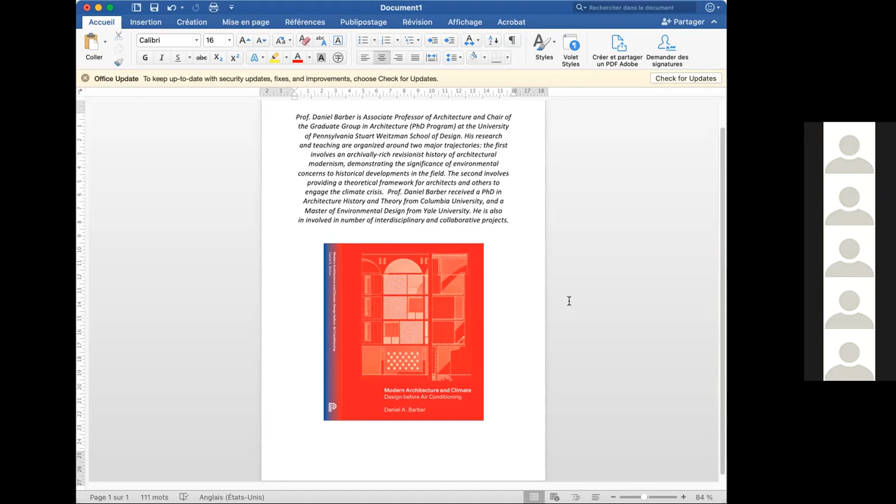Because maybe if you think why all the tapestry, the carpet, the curtain, the screen become something decorative, meaning without really use or function - it was because the central heating system, the air conditioning, solved all the thermic problem that was made by the decoration before the 20th century.

So it means a carpet in reality was a kind of thermal insulation, like a tapestry on the stone wall in the old castle was something to block the cold radiation coming from the wall.

And maybe during the 20th century, we have forgotten all this function of the decoration, and the decoration became something that was no more really important. It was just decoration with this kind of bad idea of decoration - just it's nothing, it has no use, no function.

And today, because we can no more use so much energy in the interior of the building, we have to add some thermal insulation. There is some regulation in Europe, in Switzerland - you need to have a minimum of 15 centimeters of rock wool or whatever kind of wool you want.

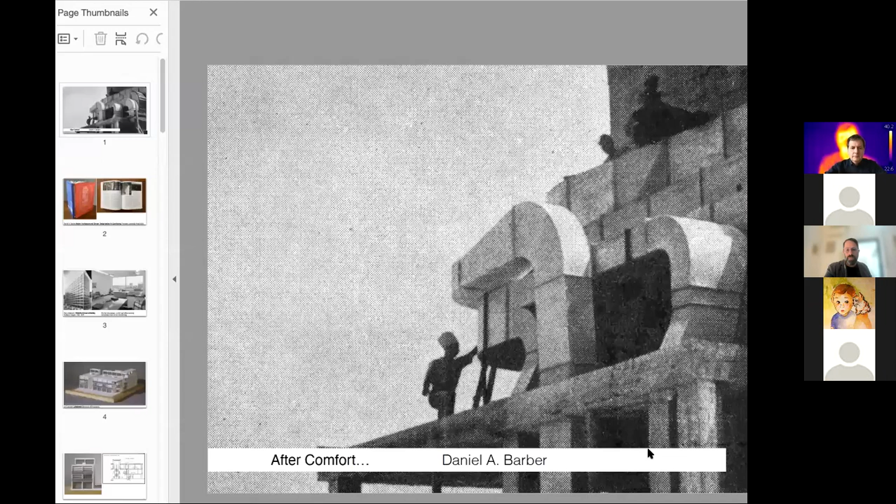So I'm going to go ahead and share my screen. Let me see - this little dance here, give me one second, I always have to do a little dance. Oops. Okay, yes, it's good, we can see. Okay, I'm just going to make one little adjustment, sorry, one more second.

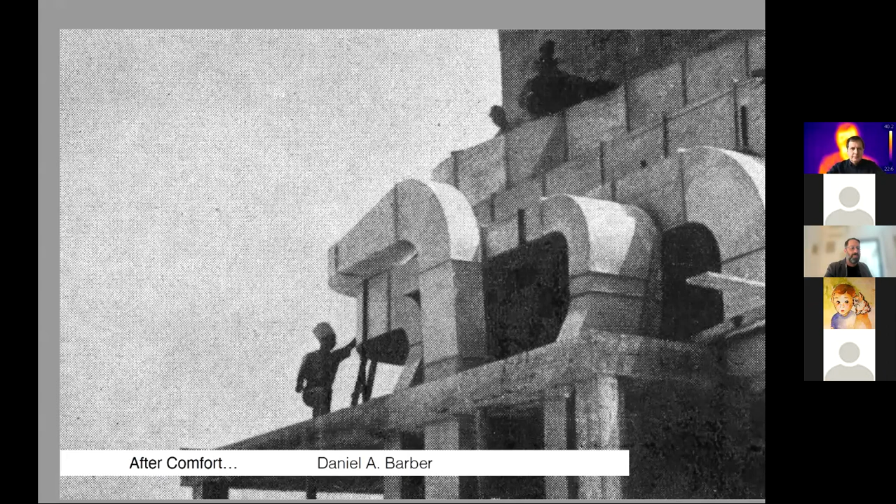As Philippe laid out, my research really has two components, and I want to try to tease out both of them today in the next half hour, maybe 40 minutes, and then hopefully have some time for discussion as well.

I'm both an architectural historian working through environmental histories of architecture, thinking about how buildings are situated in their ecological, material, political context, especially relative to questions of mechanical heating and cooling. Part of that idea is to reveal a rich archive.

And in the book that was just noted, here's another image of it. Let me see if I can get the slides to work. Okay, here's another image.

Also in my first book, called A House in the Sun, which looked at solar heating design strategies, more in the American context, the idea is to demonstrate that there's a rich history of these environmental questions in our field, and that they're available as archives for us to go back to for inspiration.

The second related focus is to convince architects and students such as yourselves—although maybe in this case you're already convinced, but we'll see how this plays out—to focus work on the climate emergency, both as an obvious and also somewhat difficult task.

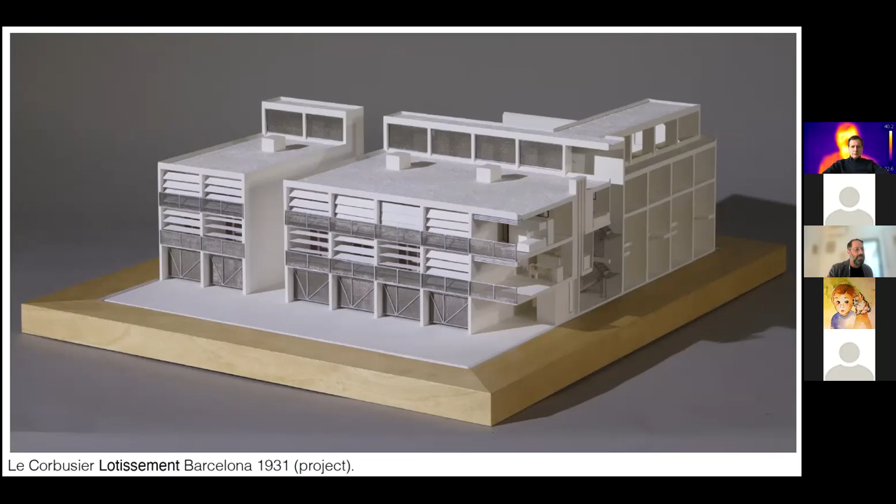So we can look at a couple of issues here with this model, made much later but nonetheless helps us see what's at stake. The main focus I want to tease out is not only that this building was essential to reimagine the facade as a climatically adaptive system, but also to do so through visual representation. Part of what I'm structuring in the book is a history of modern architecture from about 1930 to 1960 that focused on producing images around how to adjust our relationship to climate, how to reimagine these nature and culture interactions.

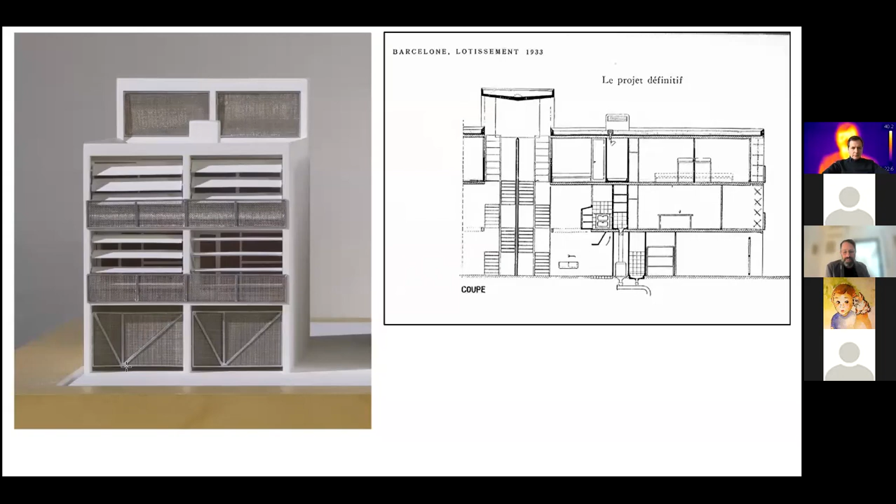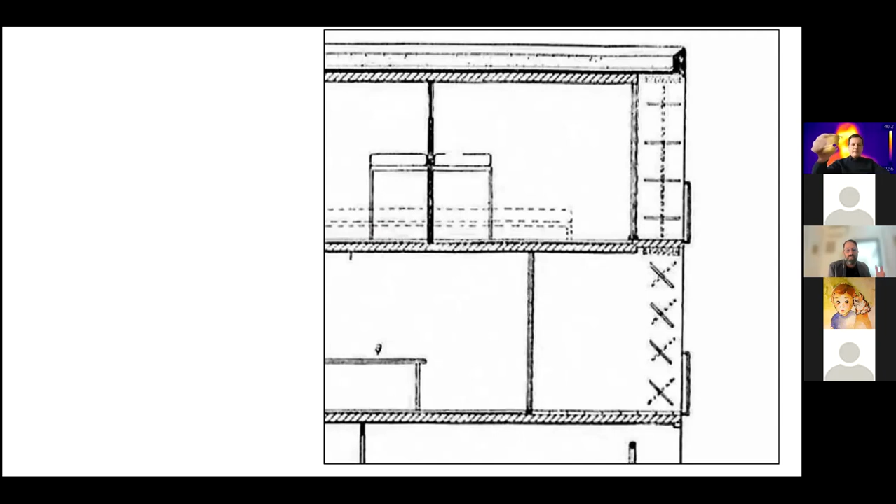In this context, we see this facade with operable shading louvers that can be adjusted according to daily and seasonal patterns. We see in this section, if I zoom in here, this way of representing that manipulable facade—both the diagonal lines and the horizontal and vertical lines attempting to render in graphic form that this facade is dynamic and available for adjustment according to different conditions. I'm mapping this somewhat tongue-in-cheek, but nonetheless as a sort of originary moment of this interest, not only in climatic adjustments, but in the ways those have resonance across graphic communication tools.

This is another, more elaborate version of the media of architecture as a device for climatic adaptability. We can even begin to imagine or choreograph those interior conditions as they relate to this facade. You might wake up in the morning and open the sash, then around noontime make sure the vanes are correctly tilted to block the sun out, and maybe adjust the blind in the evening while sitting in this planted space, allowing the sun to come in or not depending on variations of climate.

This already suggests a broader aspect I want to play out: the notion that the practice of climate adjustment is on one hand structured by the architectural design, but then enacted by the occupant. So we have both the design aspect and the experience of that aspect in the interior.

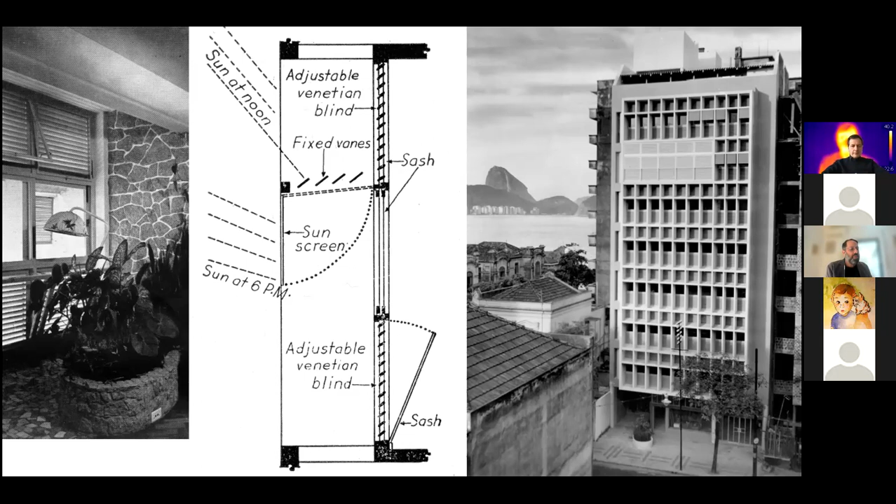So two points already on the table, maybe three. The first has to do with the graphic elements—the media of representation as a means to understand the climate relationship between the conditioned interior, here not conditioned mechanically, and the changing climate outside. The second is figuring architecture as a device for climatic adaptability, understanding that as one of the engines of the modern period, of the early developments of architectural modernism. And the third is this question of thermal practices—the different ways design and forms of inhabitation work together to articulate those specific climatic relationships.

I'm just going to run through a few images to play this out for a second—again, much too provisionally—to show that, in the broader version of this, I try to make the elaborate argument that by virtue of this climatic adaptability, we could argue that modern architecture emerges from this Brazilian context. It's really in Brazil, in the global South, in the context of finding ways to use shading mechanisms to accommodate different types of interiors.

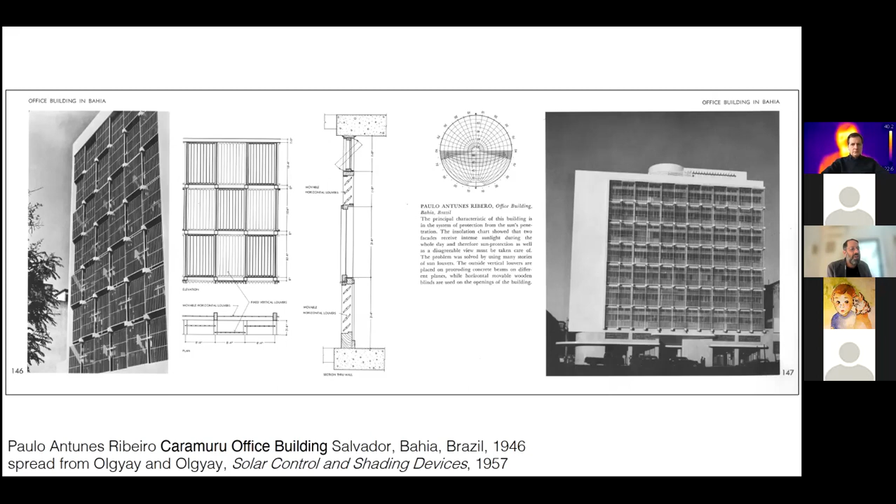It's in that context that a certain flowering of modernism begins and spreads around the world—a kind of counter narrative. I'm following here Barry Bergdoll, the eminent historian and curator, who writes in a 2015 catalog that these images, these buildings in Brazil, are previsions of a modernization to come, rather than receiving knowledge from Europe and the US, they're cycling it back, disrupting patterns of influence while celebrating the diversity and variability of these mechanisms.

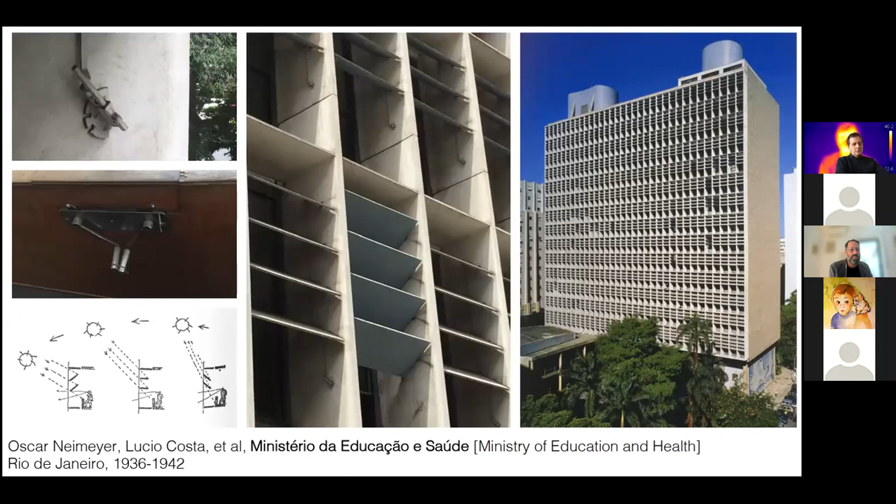This is maybe a building many of you know, the Ministry of Education and Health by Costa, Niemeyer and their colleagues, often regarded as one of the largest first large-scale administrative structures of concrete modernism, and one of the more prominent modern buildings in Brazil. In the book I trace a bit more some of the legacies this is building on—one of them indicated here.

I'm trying to map and fill out this picture of Brazil as the emergence of a certain relationship—the built interior, the design of that interior as a climatic object or climatic space, and how it relates to the exterior. What I'm skipping over today, unfortunately, is the intervention of building scientists and other specialists who helped clarify the precise details of where the louvers should go, how they should be hung, in what direction, according to emerging knowledge around meteorology.

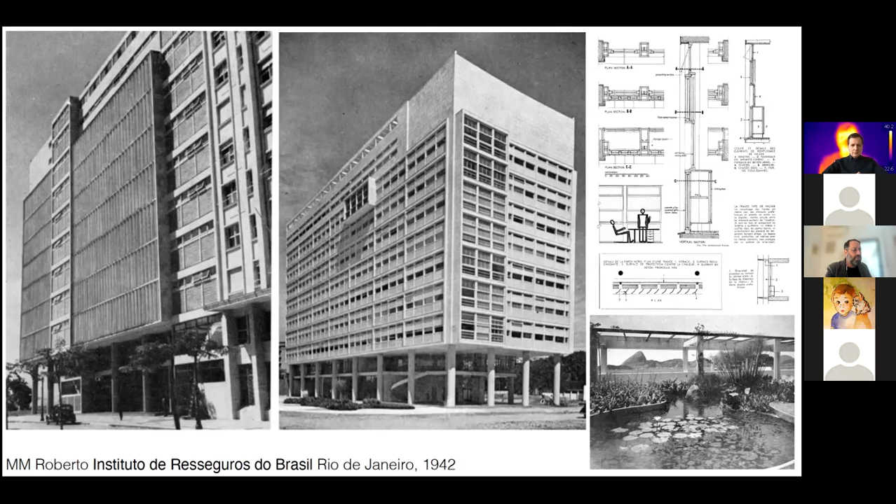But in the spirit of this quick run-through, I want to jump to other projects to expand this picture. If we're beginning in Brazil, claiming it as one of the originary sites, part of what's at stake is the political complications of Brazil in the 1930s, in the midst of the so-called authoritarian democracy of Getúlio Vargas, the Estado Novo period. This building helps clarify that this legacy of the shaded facade isn't simply a means to open up building practice in areas without much access to infrastructural energy sources.

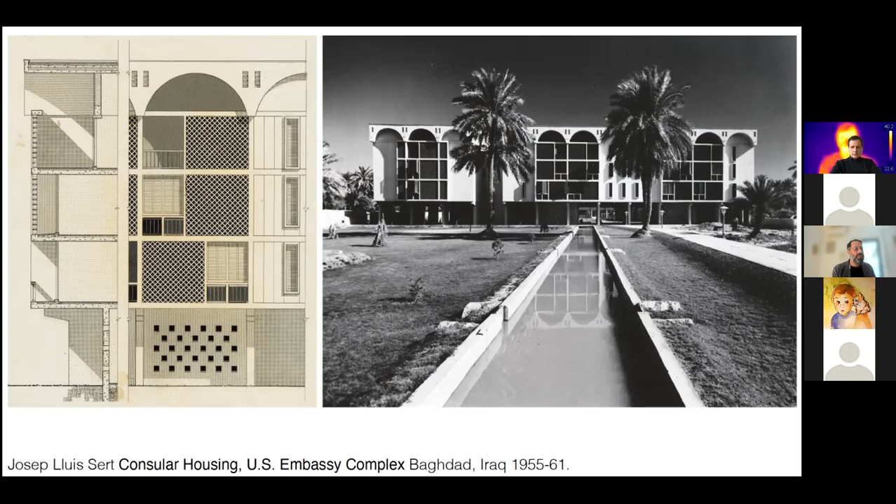So in some sense, this kind of modernization that came was that of the mechanical air conditioning system, the fossil fuel derived cooling capacity that dramatically transformed the conditions of the interior in ways those shading mechanisms could not have—and in ways that were, as we're still coming to terms with, quite detrimental to the global climate. So one more quick narrative here before I jump to a second part.

In that first arc, that first discussion, modern architecture emerged, in some sense, or a certain type of it emerged out of Brazil and performed this climatic adaptability, but did so in ways that are quite discomforting, and then cycled back to those air conditioned systems. That's one narrative—the narrative of passive cooling techniques, or at least the shading techniques that allowed for a certain type of life to persist.

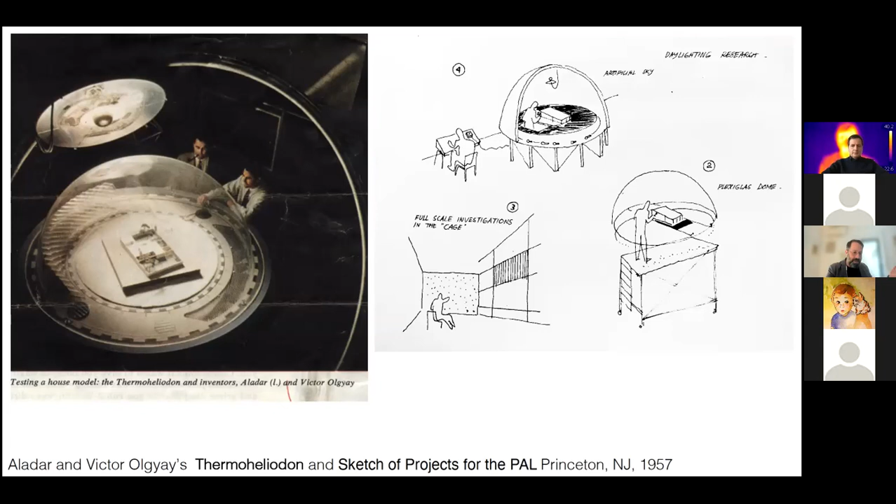Just before the computer took over, quite literally, historically, this was an attempt to perform an analysis saying that one of the essential aspects of understanding a building project is understanding its site for its very precise climatic conditions. They produced this very opaque methodological system that's quite hard to follow in any short form, and certainly even if you dig into it, it's pretty complex.

However, it's since been computationalized. If anyone is familiar with the Ecotect performance software, it's now embedded into Revit, into other Autodesk products. But Ecotect was initially programmed by a Western Australian architect directly out of the Olgyays' diagrams such as this. So what we're seeing is a sort of pre-computational set of systems, parameters, structures and processes that encourage the designer to attend to the details of the site in producing the architectural object.

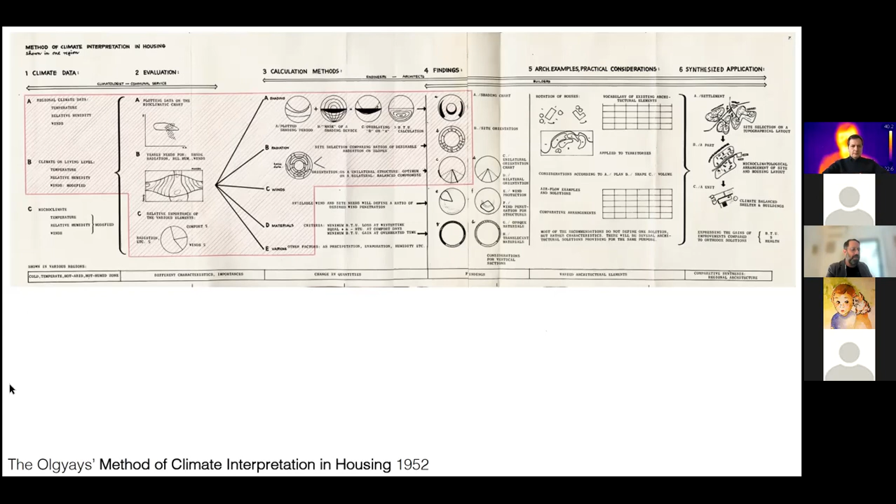So just to close this loop far too quickly, but nonetheless—part of what's at stake as these climate systems became technologized, became industrialized, entered into a broader set of architectural research strategies by virtue of providing certain technical systems and their parameters, is we see the emergence of this concept of comfort. That's what I'm going to switch to in a moment.

So this notion that part of the design process is to articulate a condition of comfort that will allow the building to mitigate and modulate the various climatic conditions in which it finds itself, so as to produce the optimal conditions on the interior.

Now, the coda to this story, the epilogue, is that while these comfort conditions were theorized and experimented with by the Olgyays and their colleagues without mechanical conditioning, without air conditioning systems fed by fossil fuels, the basic parameters they articulated were soon captured by ASHRAE and other regulatory systems that sought to optimize those thermal conditions of the built interior.

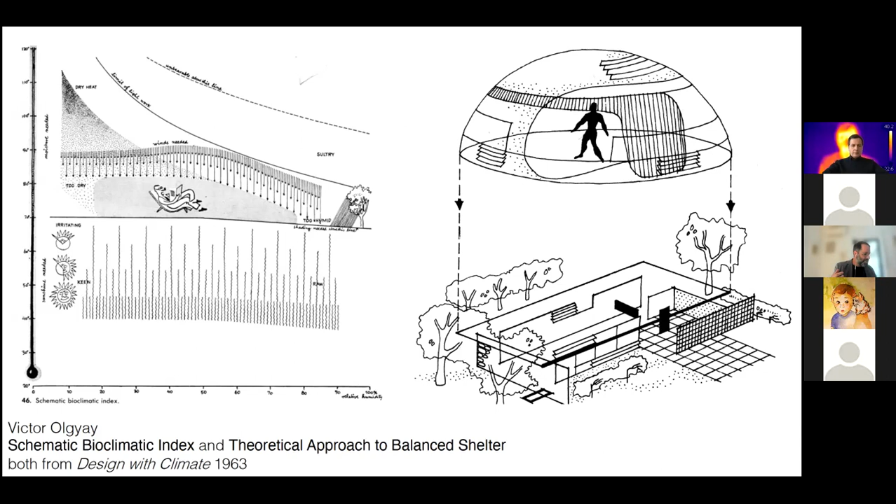And I'm going to do so while clicking through some relevant images that are not directly tied to any given notion in the text, but just to help us get a sense of what's on the table. Okay, so here I go. I'll read for about 10 minutes and then we'll open up to discussion.

So the opposite of comfort is obviously discomfort. The first we seek, the second we try to avoid. Comfort is valued because it promises consistency, normalcy, and predictability, which allow for increased productivity or a good night's sleep. Our collective allegiance to comfort is a form of self-assurance that we are not threatened and that tomorrow will be like today. Comfort indicates that one has risen above the inconsistencies of the natural world and triumphed, not only over nature and the weather, but over chance itself.

We can rely on comfort. It will be there when we get back. Comfort is integral to our designed interiors and to the causal chain that ties heating, ventilating, and air conditioning, HVAC systems, to the fuels that feed them and to the carbon emissions that result.

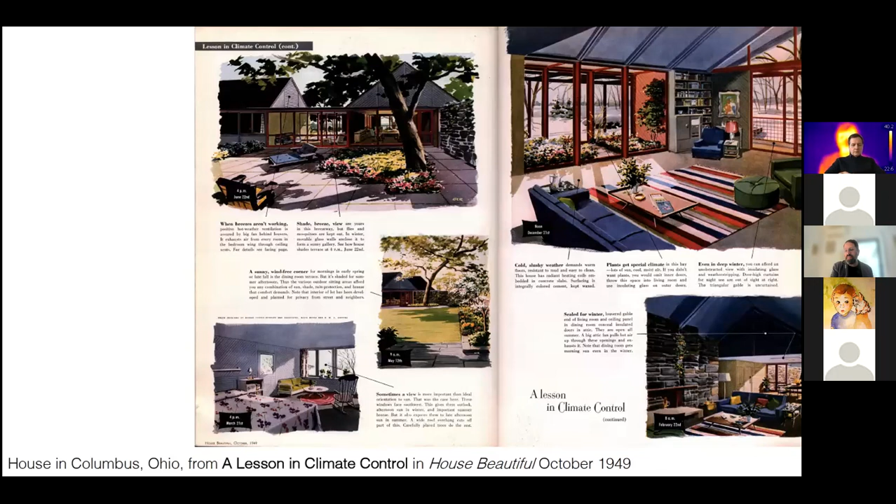Comfort applies to many aspects of contemporary life, from the mega mansions of the suburbs to luxury upholstery and cars. In this general sense, it is tightly bound with consumption. The thermal conditioning of interiors is of specific interest because it relates to the purview of architects, and certainly interior architects, and because it is invisible and difficult to disrupt. Design is part of this causal chain, organizing and aestheticizing the connection between comfort and carbon.

Class distinctions are distinctions of comfort, both broad and fine-grained. These are also economic and geopolitical distinctions. The West, the global North, the geography of industrialized capital, the global territory of air conditioning, politics in the 20th century revolve around access to comfort. The rungs of the ladder to luxury are physical, spatial, architectural, and thermal.

First comes sustenance, then shelter and protection from the elements, then heat, and last cooling, so as to remain active, healthy, and productive year-round. After these come layers of precision, filtered air, sealed membranes, sensors everywhere, all the elements of the comfort industrial complex that aims to wrap itself around the body like a favorite shirt. Yet comfort, like capital, is unevenly distributed. Not everyone gets to have the same amount.

When you have it, it is hard to let go. It's even harder to convince someone to give it up. Comfort feels normal, expected, obvious, deserved. To be well off means to never be uncomfortable. The life of the poor is awash in discomfort, striving for relief.

This struggle for comfort is a struggle for equity, justice, and conditions amenable to growth and self-actualization. Comfort, however, is in short supply, not because we are running out, but because we have to collectively adjust to its going away. Or rather, architects have to help make it go away. The scarcity of comfort is something architects have to produce through a conscious redesign of the built environment.

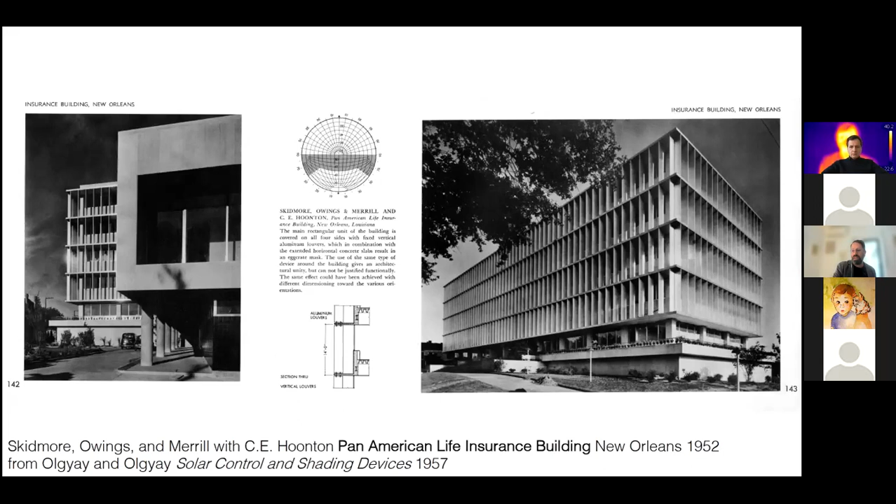Comfort has not recently been a subject for invention, imagination, or experimentation. Every little click and hum of the air conditioner kicking in, and every creak of a radiator, is a slow, extended, symphonic lament accompanying the decline of civilization. Comfort is destroying the future, in fact, one click and hum at a time.

Comfort relies on invisibility. You don't see it, you pretend not to hear it. It's just there, expected. Not only is the HVAC system hidden, so is the boiler, the fuel, the network of extraction, the labor exploitation, the carbon cost of distribution, the emissions into the air. Comfort is normal, the epitome of the normative, regulated and rationalized, embedded in constructed systems and industrial supply chains.

How can we design for discomfort and reveal these implicit structures of ventilation, of decarbonization? How can we frame livability, lifestyle, and life itself in the context of the geophysical and geopolitical implications of comfort? Could it feel good to be uncomfortable? Perhaps there would be a pleasant sense of participation in a changed global thermal regime.

We are no longer protected from the elements. The elements are assailing us, determining our collective future. The experience of comfort inside is predicated on the global acceleration of climate instability outside. We are exposing ourselves to the elements through sealed, conditioned spaces.

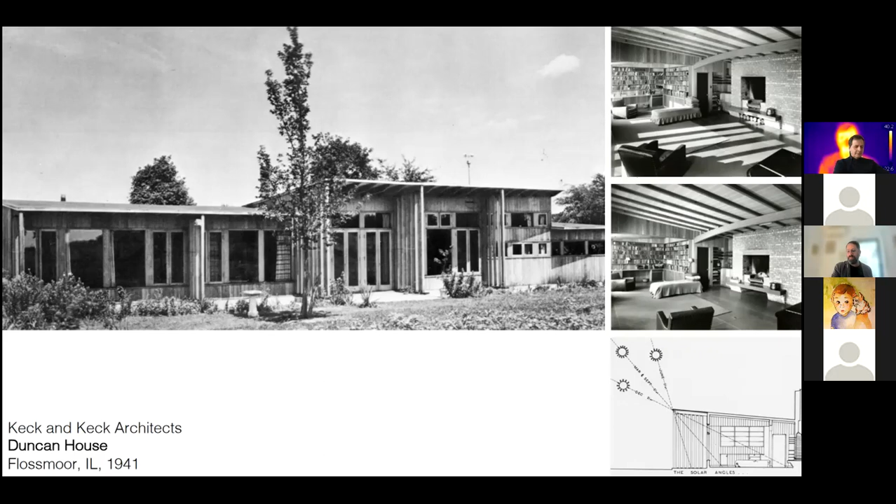The built environment is contingent. It was constructed according to specific socioeconomic conditions, collective desires, and cultural interests. It can be rebuilt according to new conditions, new desires, and new frameworks for cultural elaboration. Such reconstructions also reimagine relationships to resources, economy, exchange, and equity.

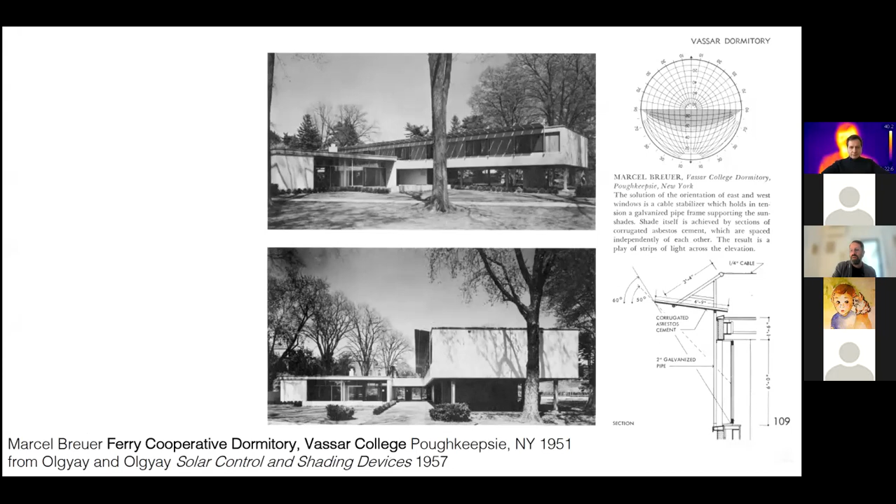Architecture's new ambition is to condition humans to be less comfortable. A first step, retrofit. House Resolution 109, which was the kind of proposed legislation of the Green New Deal in the United States context, and relates, in fact, quite directly to the new European Bauhaus discussions in the EU.

House Resolution 109 calls for, quote, upgrading all existing buildings in the United States to achieve maximum energy efficiency. The Green New Deal reaches out towards disciplinary transformation. It hurts, though, perhaps, to think of architecture's role as simply upgrading.

It reveals burning questions. What new construction can be justified? If it is really all about carbon, what is left for architects to do? Where can we focus our carbon budget? On hospitals, archives, spaces for healing? What other spaces, residential, commercial, for work and play, can be left open to the elements, at least figuratively, if not practically?

The savvy design collective of the near future sees opportunity in designing for discomfort, in careful retrofits that reduce comfort, reduce carbon, and offer new ways of living. Through collaborations with physiologists, engineers, artists, and others, design methods can not only reduce reliance on mechanical conditioning, they can also be compensatory, creative, and instructive.

The experience of a room or a city can encourage and reward the lifestyle, habits, clothing, and activities that reduce comfort. This transformation is profoundly cultural. It resists sustainability metrics and exceeds performance softwares. It focuses instead on the contours of our desires and our values. This is the role for architecture, even in the context of retrofits.

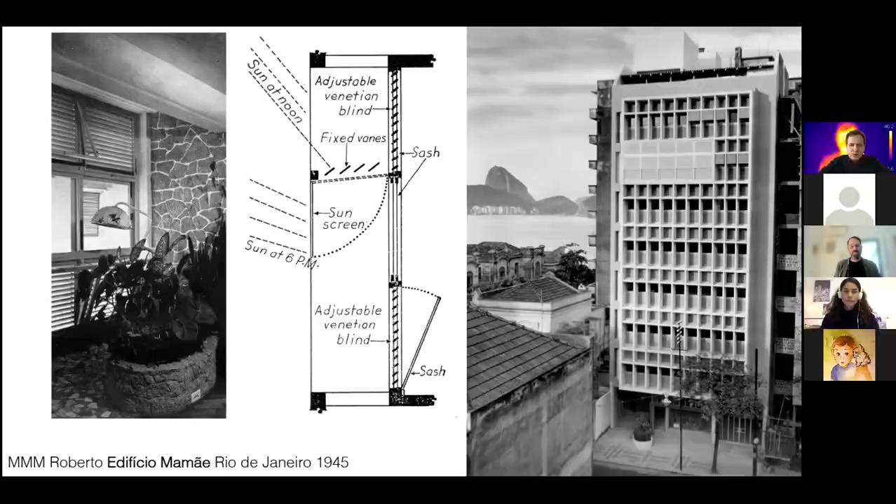The discussion about climate when I was a student, or before, we saw a lot of images like the one you showed. It was more for the South countries, for hotter countries. So we learned that we have to think about climatic issues when we are doing something for the equatorial latitude. And there is a lack of thinking about the Nordic latitude. When I was a student, it was normal to use a central heating system, radiators, but it was not normal to use air conditioning. So there is a kind of unbalanced discussion: okay, in Europe, in Switzerland, we can use radiators, but if we are doing a project for southern latitudes, we need not to use air conditioning.

I was sometimes in panels, in discussions about that, and I was a little stuck about it because of a discussion I remember about air conditioning in—I don't remember which country it was, maybe Vietnam, something like that. And people were talking about this kind of Americanization of Vietnam through air conditioning, like it was a cultural point of view to bring air conditioning into Vietnam, because in Vietnam there were solutions for not using air conditioning historically. The introduction of air conditioning was more a cultural decision, or maybe an imperialist decision, more than a physiological decision.